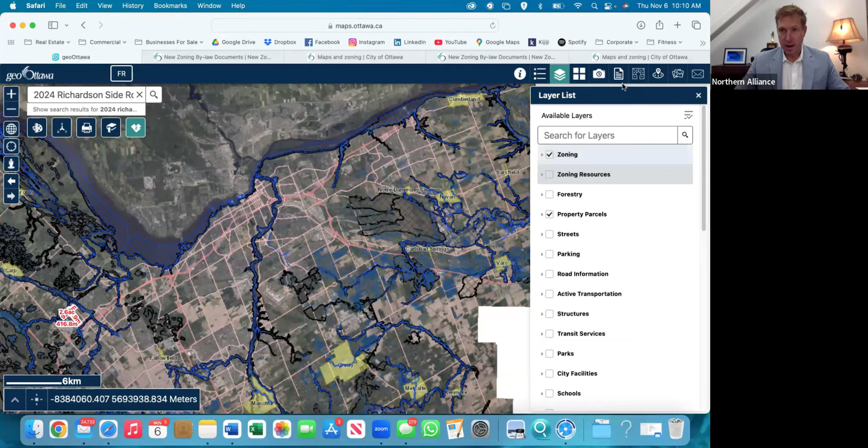As always, Geo Ottawa is our Bible here to all things City of Ottawa, and there's a link to the new bylaw - this is the easiest place to find it. It's Geo Ottawa, and as always in our layers list up top, we can open the different layers. Right here under zoning resources, I've always got zoning on, property parcels, planning - as many of you know, are the big ones. But under zoning resources, the new draft bylaw is here, and there's a draft 1 and draft 2.

Draft 2 is the most updated one. I've got it checked off, but as you know, the box of the actual zoning resource has to be checked as well. These are all the subheadings, but we've got to turn on the parent box, and this now shows the new zoning bylaw draft that they have.

So just like the other interactive zoning, you can click on a property and go into, I'll just go somewhere downtown perhaps. You can also go back to the legend. As always, when you've got something turned on, you can go to your legend and you can see what has been turned on. If you look under the zoning resources, every one of these colors is identified.

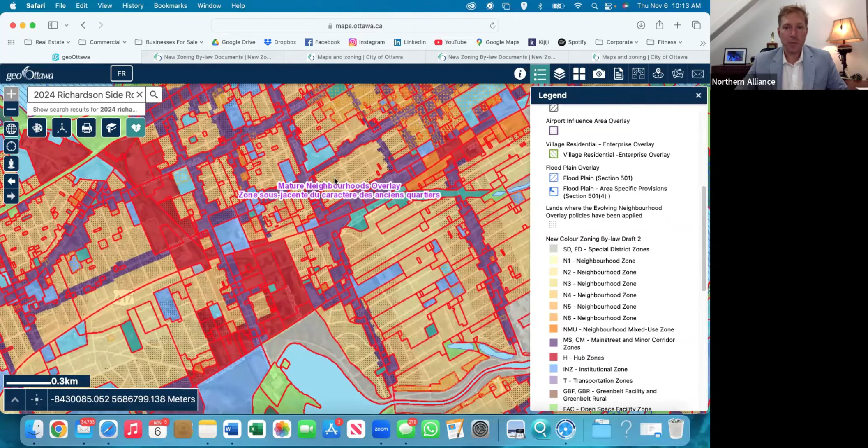These neighborhood zones are classified for density and mixed use, and as of right now already, we can go in and click on any of these properties. I'll click on one that I don't really know about just for fun and see. H is a hub zone.

MC is a hub zone. And then we can click on the link to the bylaw text and go right to what the use is. It's a MC apparently is a mixed use central zone. And if we go back and toggle off these zoning resources, we're left with the current bylaw. Well, that one still is MC right now.

Let's try another one. But basically, go back and forth on any properties that you see. Oh, it's just showing the... Okay, that zone must not have been changing, MC. So right now I've got

R4UB as a zone. If I toggle over, okay, they don't yet have it linked to the new zones. When you click on the zone, it's still, regardless of the zoning overlay, it just links you to the current R4UB zone.

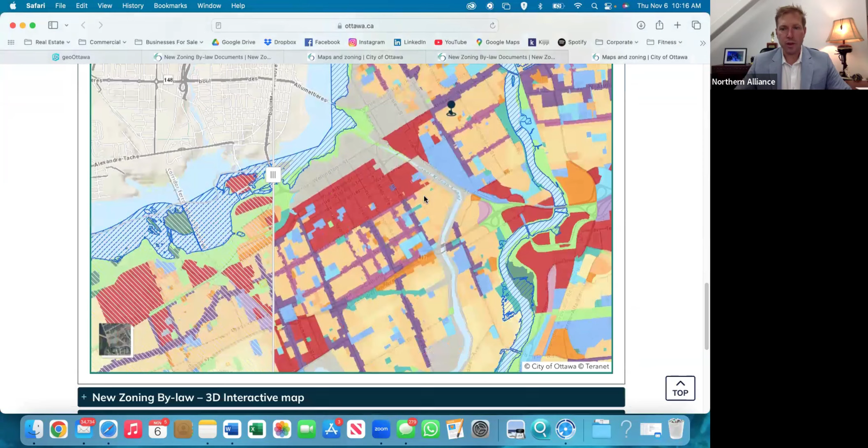This is what the interactive map looks like within the actual website itself. And it still looks like it links to the current zone.

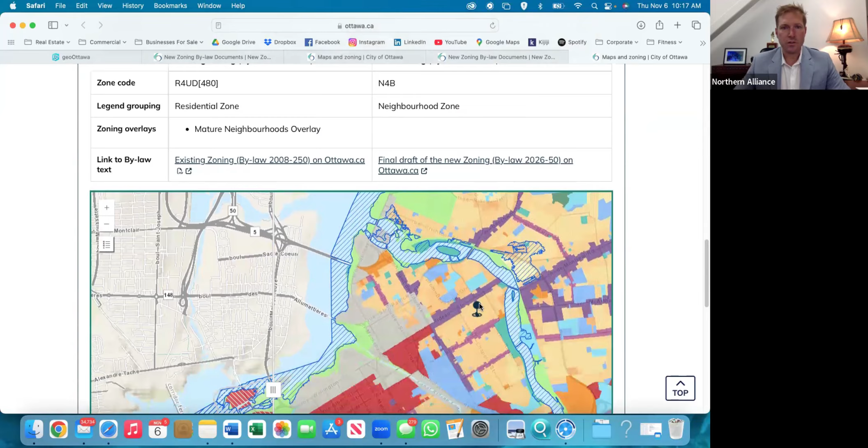Oh, okay, look at this. Within the fabric of the city's pages, when you click on the zone, it shows you the current zone, R4UD 480, and it shows you the new zone, N4B. And here is where it will link. It'll go back to the actual neighborhood zone, and then you can click on which zone it is, N4B.

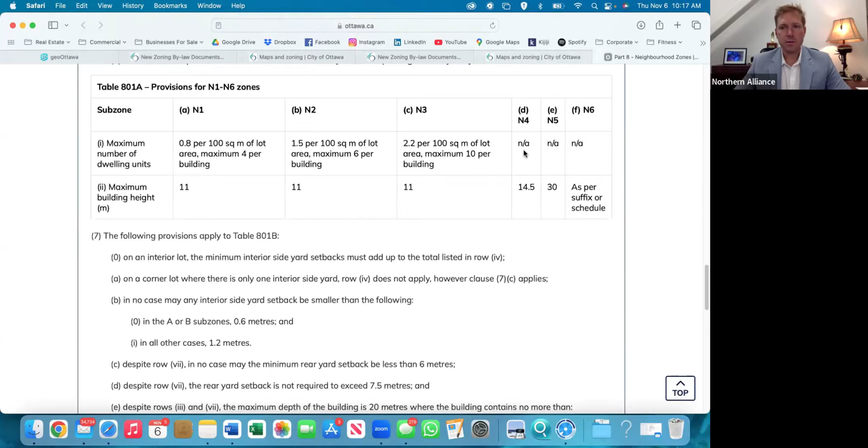Look up the section and see what N4 shows, maximum heights and all the information that you might want to find in there. So it's still a bit of a treasure hunt to find the information, but it is out there, what they're doing with each zone and its intention.

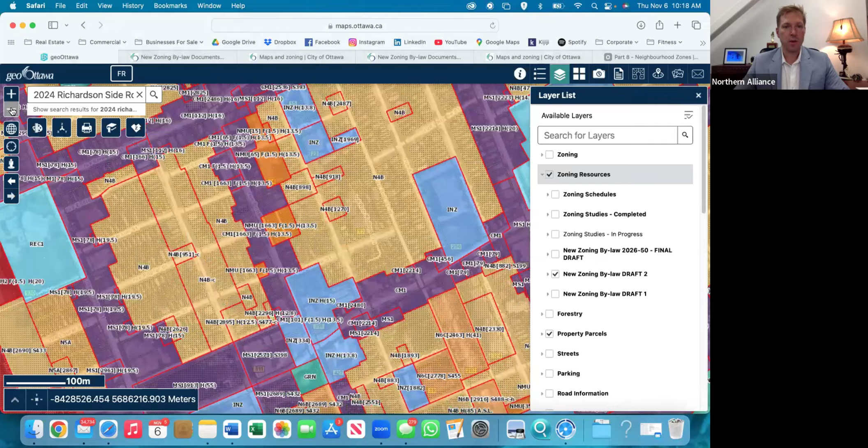So if you have a property that you're working on, for yourself or for some clients, it's worth looking up what the actual zone might be and might be becoming, because there's opportunities coming, for increased density and things like reduced parking, increased height, increased number of units.

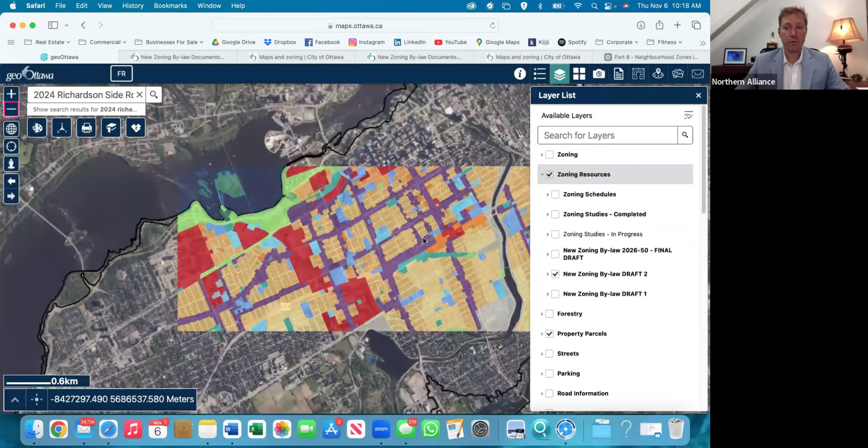At minimum, every property in the city is going to have the ability to have 3 units on it, and most of the zones in the core will allow for much more than that. So a property right now that you might fit a fourplex on, with the current zone, with this new zone, you may even be able to double it. There's reduced parking. In some cases, they're removing parking requirements altogether for new development applications.

So this is big news to property owners. It's especially for developers, we're going to see a lot of opportunity coming, because of this zoning change.

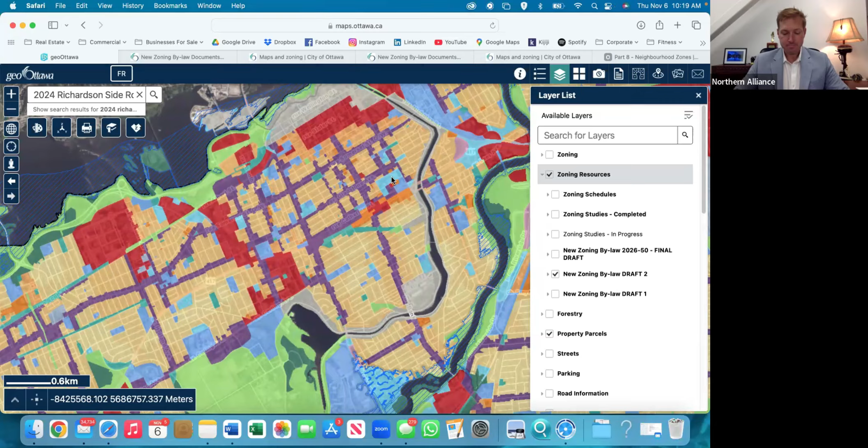Hey Chris, yes, thank you for stopping. I just sent you a link. I just saw this yesterday in an advertisement, but it's a good link to use. I just, in the chat, sorry. In the chat? Yeah, it's a good one to use. Just if you have an address, you just type it in and it tells you exactly. It's a quick little...

Actually, while I've got that - I guess I can't look at the chat. But if you look at the next link I sent, it's a good little overview. It'd be nice if we had something like that for customers, because it's a Coles Notes version of everything being changed, and reach out to us if you're interested in seeing what your house can be done.

I like it. Yeah, it's a great idea. We should brand something Metro City like this.

I have to toggle on and off sharing my screen - when I'm sharing my screen, does anybody know how to? You should be able to, if you just hover over it, you should still see the chat box come up. It's just smaller, right? It's up top, and usually.

Got it, thanks. If you scroll down here, they basically outline all the changes in a Coles Notes version. They're basically just trying to get customers to find out what they can do work-wise. But they had a nice commercial as well, a video they did.

Yeah, I like it. Not that I want to steal other people's stuff, but borrow - improve. We could sort of use it as a, hey, if you're interested, click this and we'll reach out to you, and they're interested in maybe doing something, right? Yeah, it's a great idea.

Well, I've got these links here, I'll throw in the ones I had. I think one is exactly what - yeah, I just went to the address part. This is the engagement, and this is the link to the bylaw. On that exact page, there's plenty of resources - the zoning bylaw itself is obviously big, but you can go right into different sections of it. Yeah, that's where the map came from.

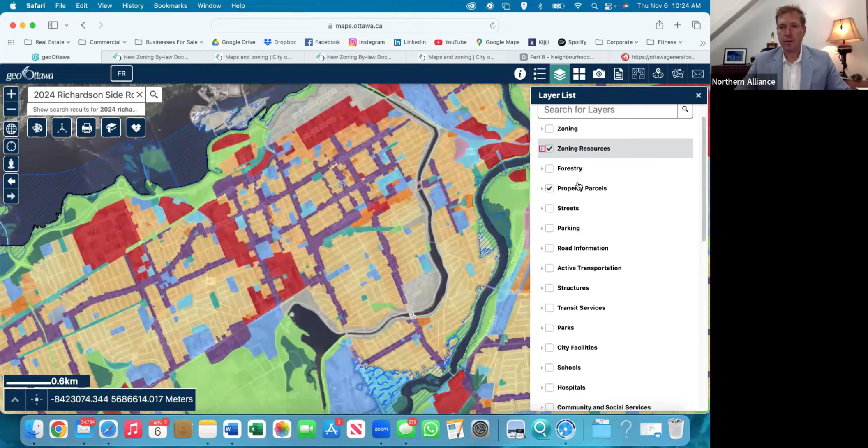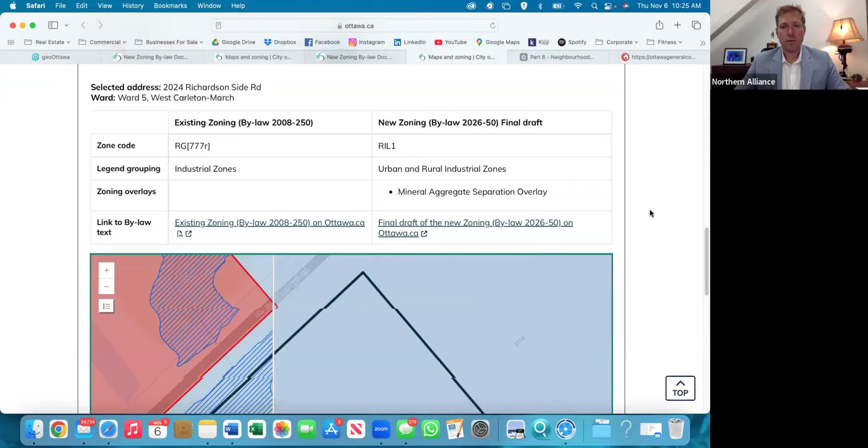So obviously, I think geoOttawa is a great function to be able to toggle on and off and identify where things are, but the actual zoning map itself has better links directly to what it's going to be. This is my property coming up on Richardson Side Road. It was RG, and it's changing now to RIL1.

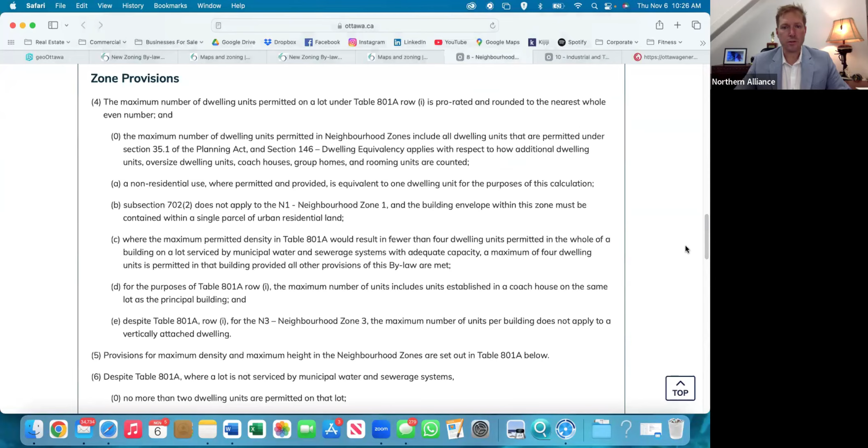RIL. It'll take some time to figure out where all these places are, but anyway, I won't bore you with that particular property, but it's a great resource. This is where to do it.

Okay, anybody have any zoning related topics they want to cover? I just wanted to go through this, obviously we don't have a comprehensive list of every zone yet. Just like Kevin was talking about, we'll create a better outline, a cheat sheet for people, because we don't even know every single zone and the height restrictions off the top of our heads, but we can go and refer to Geo Ottawa to understand what can and can't be done. I think a cheat sheet to generally inform buyers is a good idea, but having information about where to find this is key. So save those links we threw in the chat, and I think that's a good place to start.

Anybody? So I don't have anything planned for the back half of this. Is there anyone that has a property we want to look up and see?

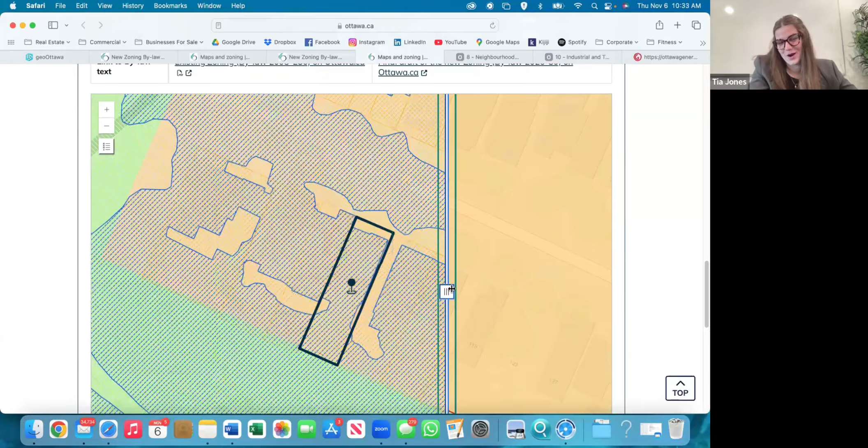Let's ignore the floodplain conversation for the time being, I feel like that's a different use. Let's keep this on topic, I feel like they extended the zone because we've looked at it before and it was only through half the property. Well, anyways, let's go to Geo Ottawa. 107.

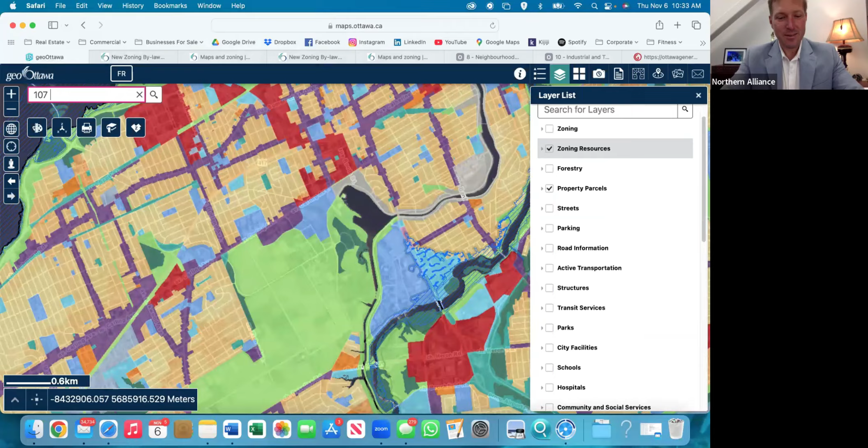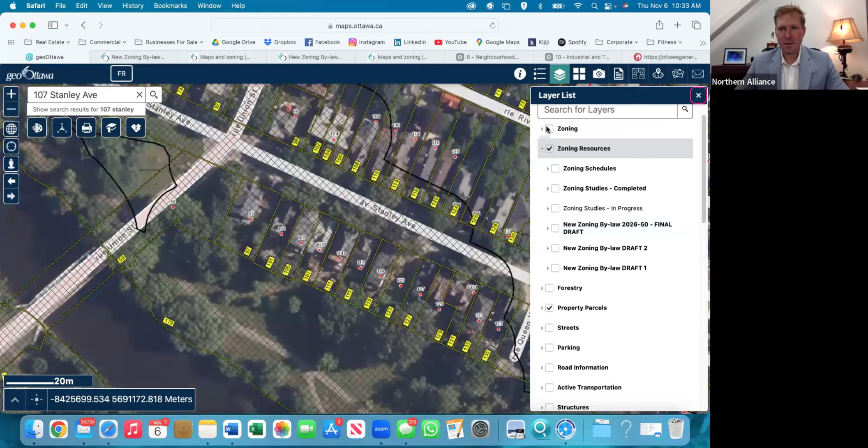But I don't think it's part of the floodplain. If you toggle off the existing zoning and just look at the final, the floodplain's gone, right? That's what I'm trying to figure out. Can't toggle off the zoning because that's where the floodplain is located. No, sorry, not there, I'm talking about the other page. Where we were just looking, where it showed floodplain. If you go back to that other web page and scroll up.

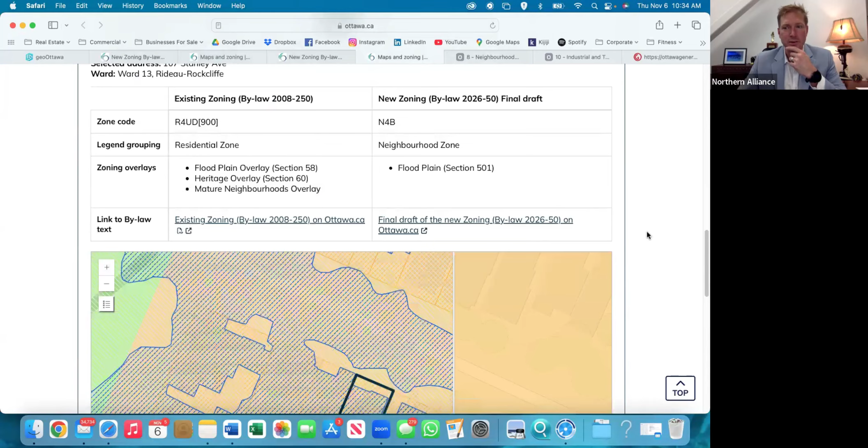Now to turn that off, display existing. But the existing zoning is what has the floodplain overlay on it. Now we want to go to final without it. That's what I was saying, so then it doesn't. But this final is just for zoning. They're not going to change flood stuff. All of the floodplain mapping is going to be the conservation authority. Oh okay, it's a different layer. The floodplain doesn't affect the zone.

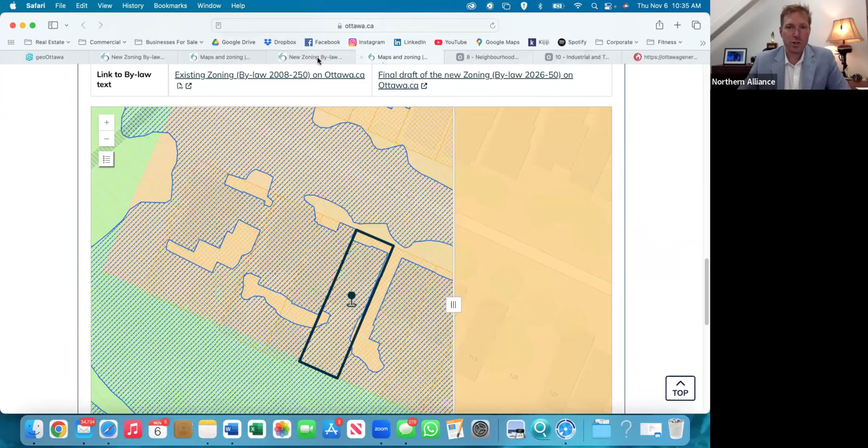They're not changing any of the floodplain mapping. That's a whole entire other issue with the conservation authorities. So you can turn that off, but it's not going to be removing the floodplain. The floodplain changes are driven by the conservation authorities in conjunction with the city, so I would suspect that it is going to remain. So this is the current status of the property, and it's entirely within the floodplain.

So I guess might as well speak to that. We're here to learn, so I'll give my opinion. Because there's a current structure within the floodplain now, obviously the current building can remain, and I would suspect they would be able to keep the same footprint of the house if they were going to knock the building down and build something new. I suspect they might get objection with the specifics, even though there might be increased density or footprint allowable under the zone, they might get pushback from the conservation authority and have to stay within the same footprint. They should still be able to achieve more units within the property, but they might just not be able to make it any larger. I think they increased the height from 11 meters to now 14.5, so at least there's that.

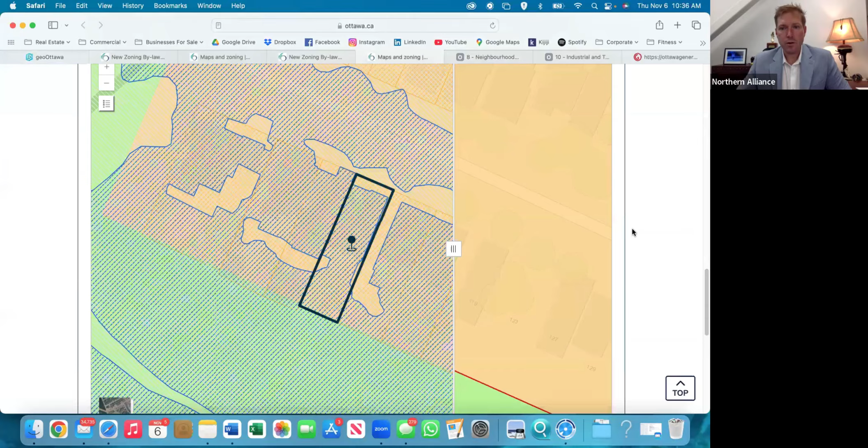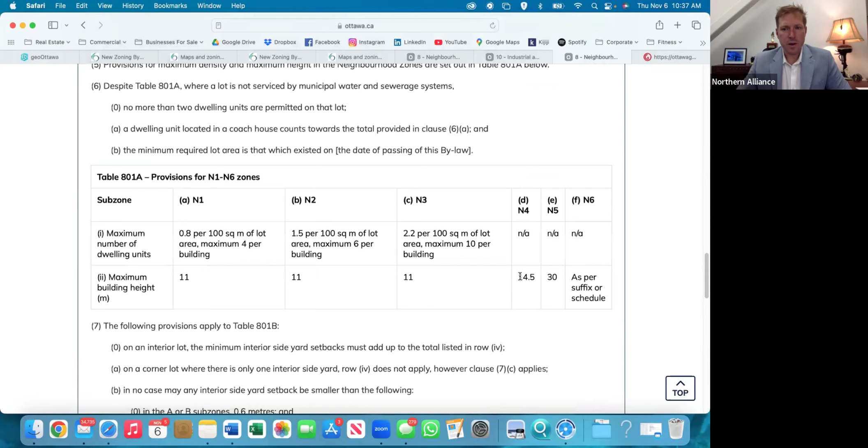I've got a lot of pages. So what do we do here? We'll go to N4B, N4. Maximum height 14.5 meters. And here's the subzone, minimum lot widths.

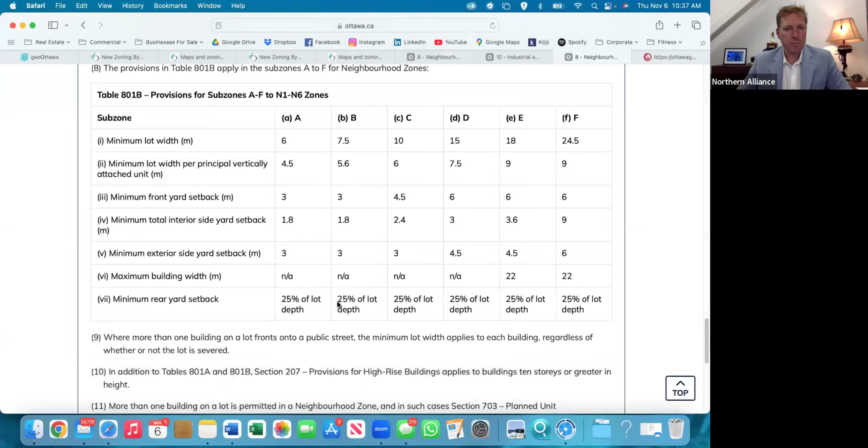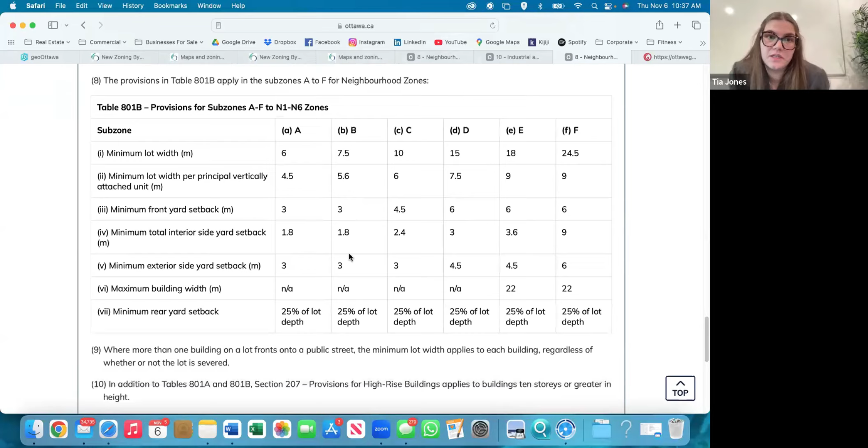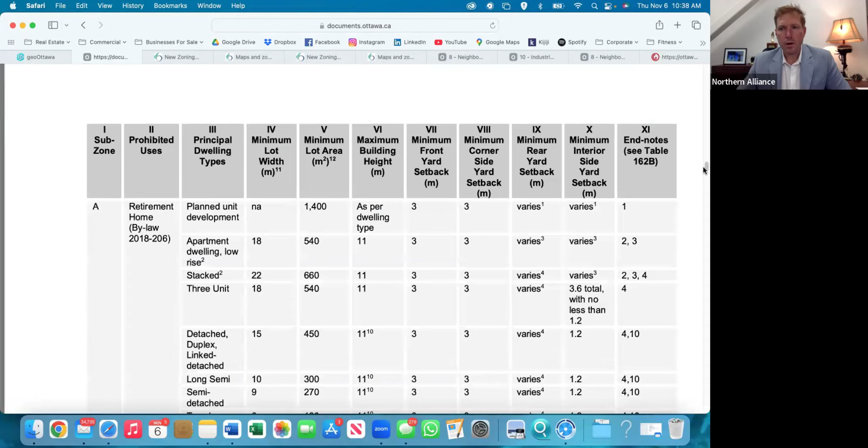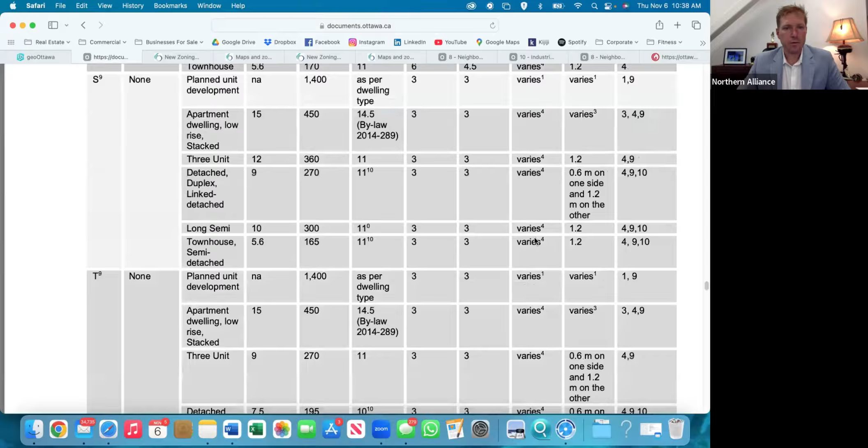Minimum rear yard setback - that might be affected because of the floodplain itself, like conservation. Yeah, because right now it's closer to like 50%. I don't know what the current bylaw is, but what they have there is closer to like 50. The current bylaw, R4UD, minimum rear yard setback is third from the right. It says varies. Probably another one back here. UD varies - not very clear, have to dig a little bit deeper to get that one.

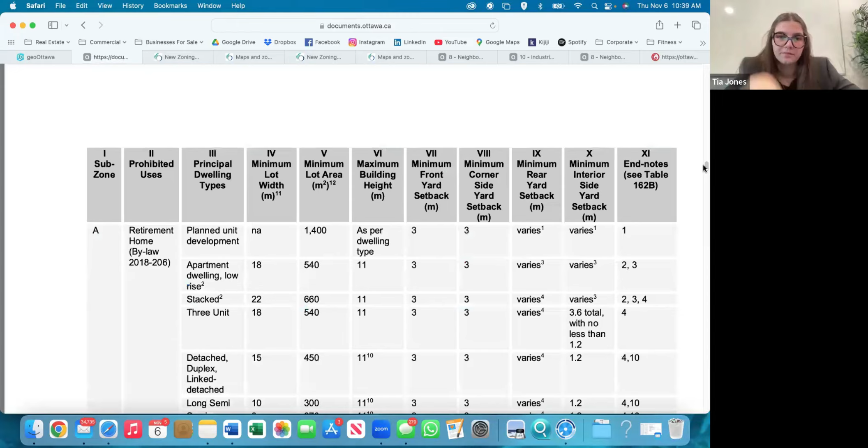What's the height? The original height was 11, I think. Yeah, I'm pretty sure I remember it being 11. I think you're right. Did you see that somewhere in here? I think it was on the same table. Building height, 1, 2, 3, 4.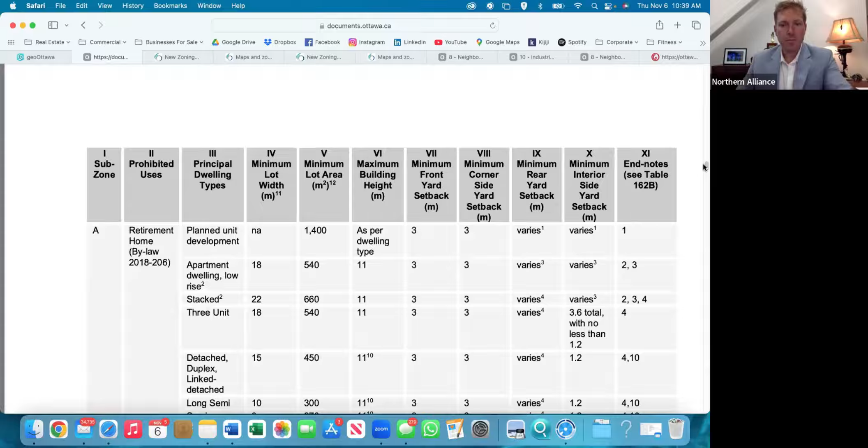I wish they would lock this top so when you scroll down it would stay. Just memorize them all, come on. You're talking about the city of Ottawa here. I know.

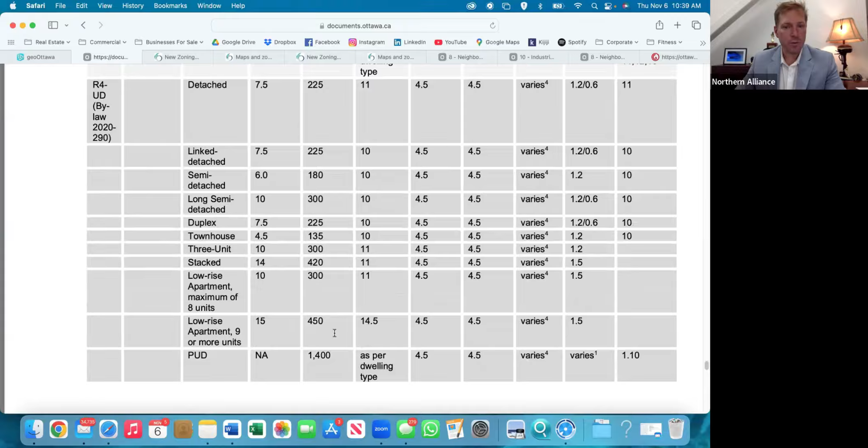10 for a semi, 11 for detached, 10 for semis and duplexes, and 11. So they're definitely increasing it by 3.5 meters for a low-rise apartment. Unless they can fit 9 apartments on a tiny little spot, they're gonna be really small apartments on the same footprint. You'd be surprised what people are gonna be able to fit on here now.

We're gonna see a lot more. Well, it looks like as long as you meet the setbacks, you can have 4 units minimum, right? Correct. I guess you can build them as small as you want, like 2 apartments per floor, just end up with small units.

So I think, in my notes, I even have, just like Kevin said, I think that we should create some presentations or some propaganda to put out, and encourage discussions with our clients to make sure that they know this is happening.

For our average single family buyer, they're just looking for a home. It's not largely going to affect them. They might be able to put additions and cover more of their lot. But this becomes really valuable for people's income properties or investment properties.